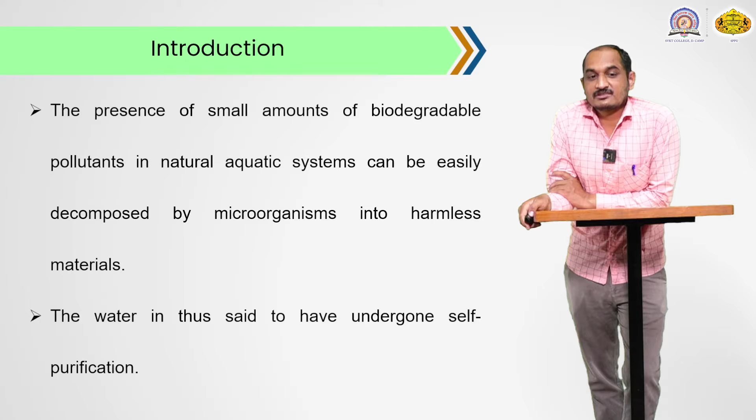First, we discuss the introductory part. We know that the presence of small amounts of biodegradable pollutants in natural aquatic systems can be easily decomposed by microorganisms into harmless materials. The water is said to have undergone self-purification, that is the self-purification mechanism for the purification of water. And there are several other mechanisms by which nature tends to purify water during the course of the hydrological cycle.

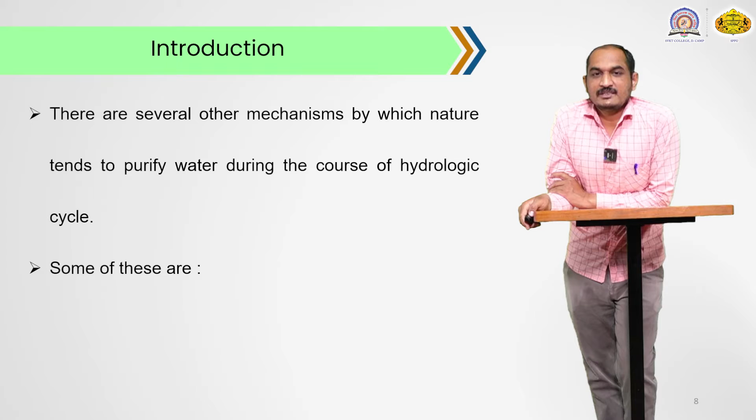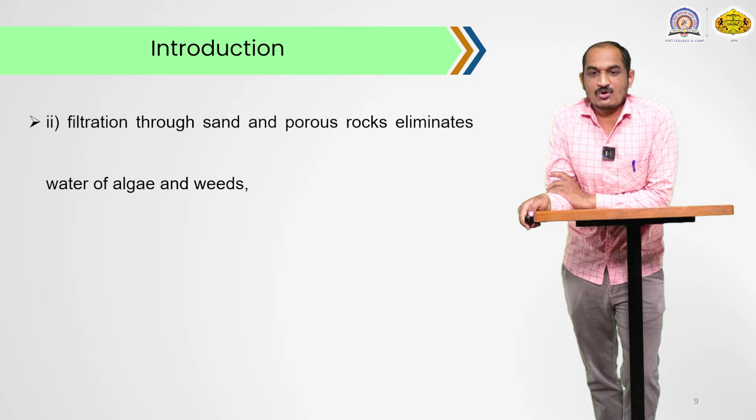We know the hydrological cycle; we already discussed it in our previous sessions. Some of these processes are given here. First, the crystallization of water as ice or evaporation as vapors removes the dissolved constituents. Second is filtration through sand and porous rocks eliminates, water of algae and weeds.

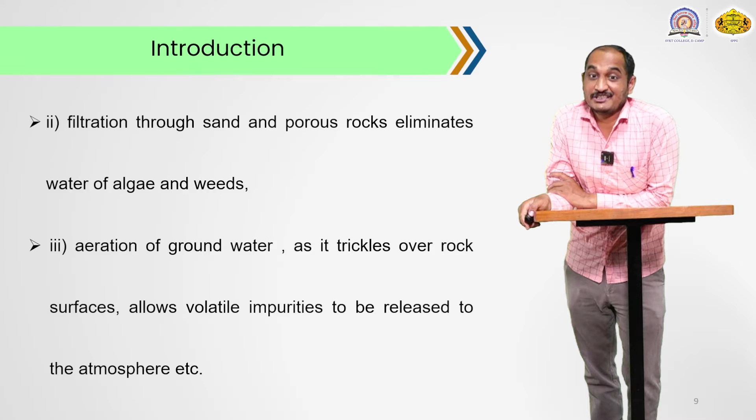And the third process is aeration of groundwater as it trickles over a rock surface, which allows the volatile impurities to be released to the atmosphere. These are the natural processes to purify water, and we say this is the self-purification process of water by nature.

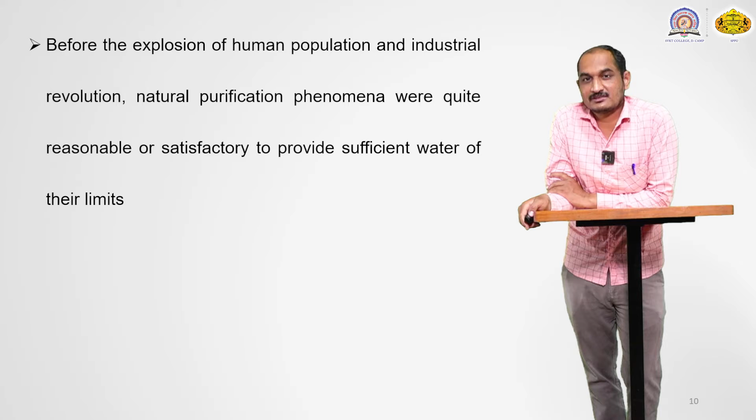Before the explosion of the human population and the industrial revolution, natural purification phenomena were quite satisfactory to provide sufficient water within their limit through this self-purification process, because the population was very small, and due to that the demand for purified water was fulfilled by these natural processes.

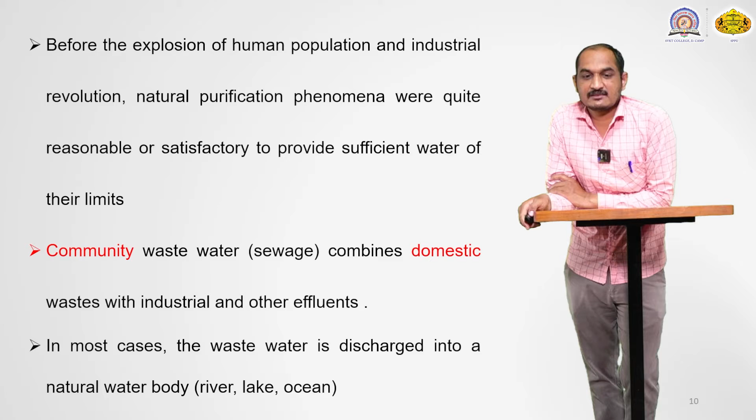The community wastewater, we say, is sewage, which combines domestic waste with industrial and other effluents. In most cases, the wastewater is discharged into natural water bodies like rivers, lakes and oceans. Therefore, a series of purification operations are necessary to restore these natural characteristics and the life-sustaining qualities of water.

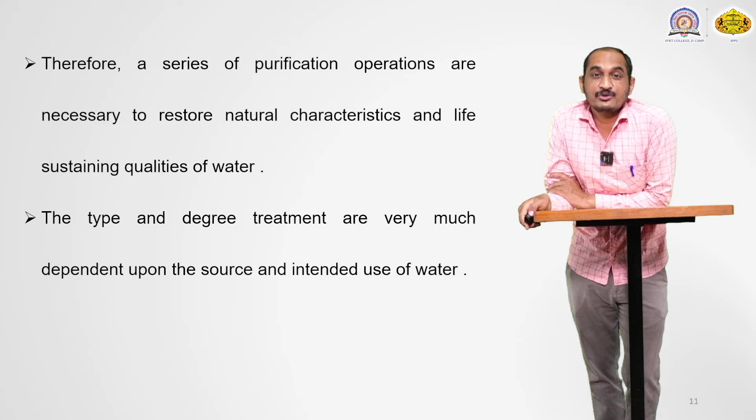So the type and degree of treatment very much depend upon the source and the intended use of water. These two terms are most important during the purification technique: one is the source and second is the use or purpose of water. In this section each major kind of treatment process is discussed.

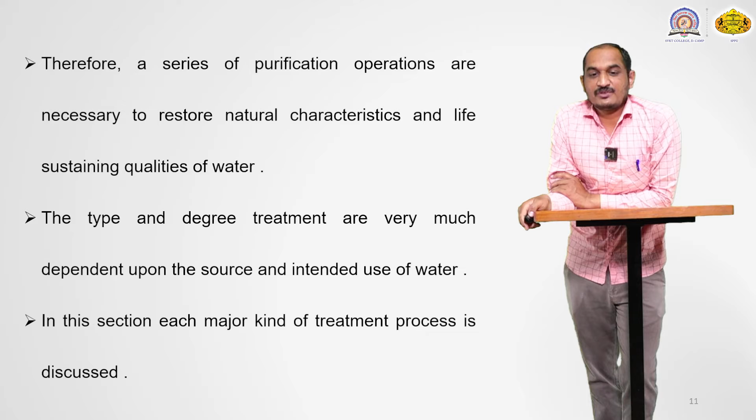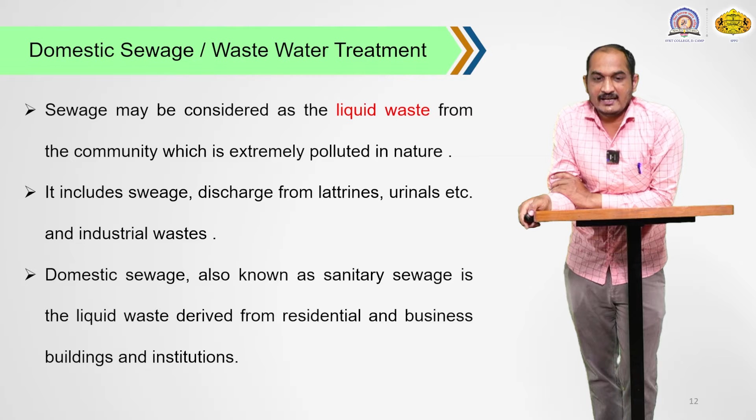First we discuss domestic sewage or wastewater treatment. We know that sewage may be considered as liquid waste from the community which is extremely polluted in nature. It includes sewage discharge from latrines, urinals, etc. and some industrial waste also. Domestic sewage is also known as sanitary sewage, and is the liquid waste derived from residential and business buildings and institutions. This is domestic sewage.

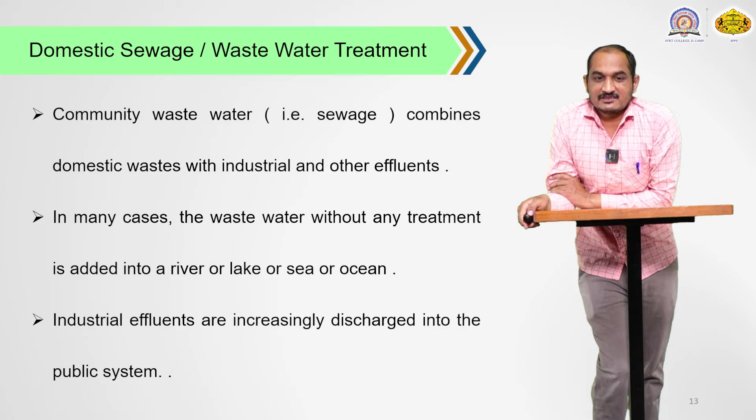The community wastewater, we say sewage, combines domestic waste with industrial and other effluents; we already discussed this point in the introduction section. In many cases, the wastewater without any treatment is added into rivers, lakes, seas or oceans, and industrial effluents are increasingly discharged into the public system. There are different examples of this type of discharge of industrial effluent into different public systems.

And the major constituents of community wastewater are thus obtained from domestic and commercial sources also. These are made up of human waste, because human beings are majorly responsible for water pollution. That includes human waste, solid and dissolved forms of food waste, then soaps, detergents and soil residues.

So efficient sewage disposal is important to the health of any community, and the easy method of municipal sewage disposal is the dilution method. We know that it's a very simple method for purification. In this method the waste is dumped into an available body of water such as a river or lake.

The oxygen present in such water bodies, over time, destroys the organic sewage. This is because under natural processes, most of the biodegradable substances of the sewage are rapidly destroyed, as microorganisms use the dissolved oxygen for the biodegradation of the organic content.

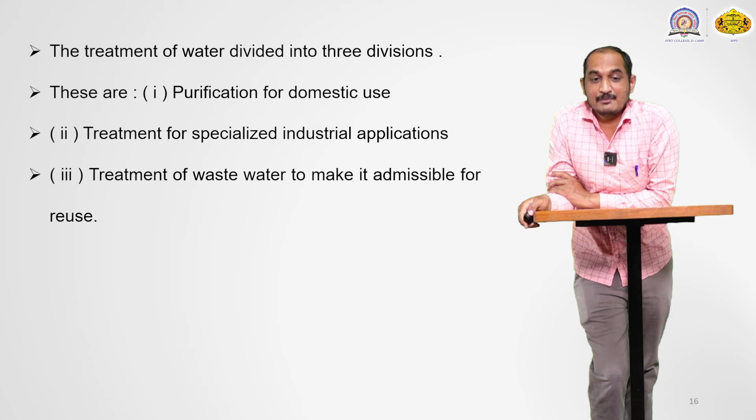The treatment of water is divided into three divisions, that is purification treatment. First is purification for domestic use. Second is treatment for specialized industrial applications. Third is treatment of wastewater to make it admissible for reuse. These are the three types of sewage water treatment.

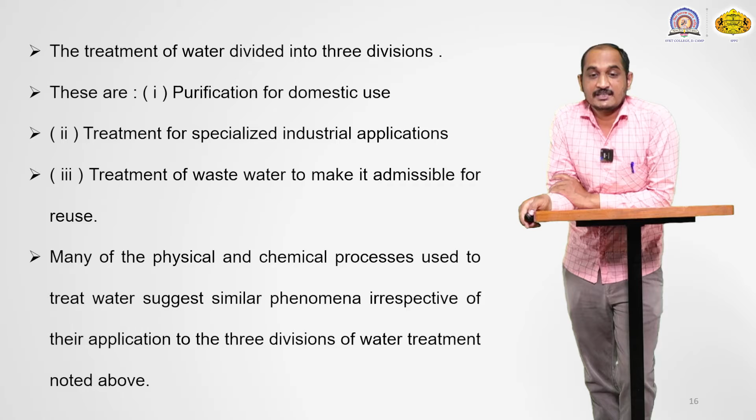Many physical and chemical processes are used to treat water. Purification requires different types of chemical and physical processes, similar phenomena irrespective of their application to the three divisions of water treatment noted above. This is a most important point concerned with the purification of municipal wastewater treatment. The most important function of the water treatment plant operator is to ensure that the water plant product offers no hazards to the consumers.

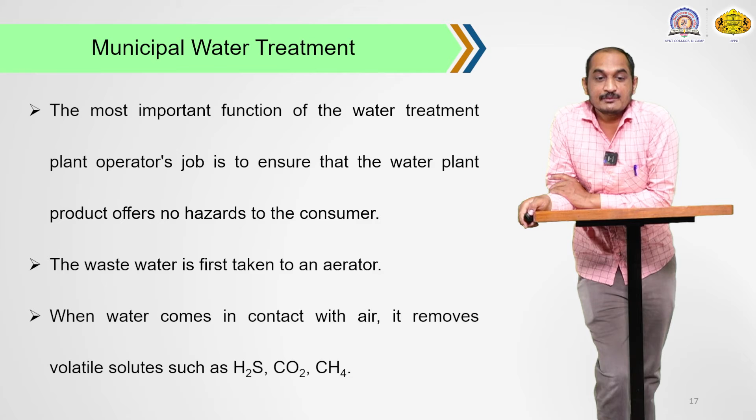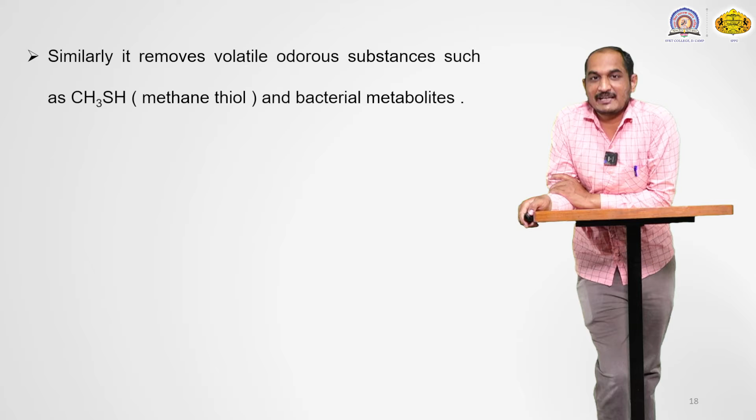The wastewater is first taken into the aerator. This is the first step for purification of municipal water treatment. In the aerator, water comes in contact with air and removes volatile substances like hydrogen sulfide, carbon dioxide and methane. Similarly it removes volatile odor substances such as CH3SH, methane thiol, and some bacterial metabolites. Then contact of oxygen with water helps convert soluble iron into insoluble iron, Fe2 to Fe3, which is a simple process of oxidation.

After the aeration step, lime as calcium oxide or calcium hydroxide is added to raise the pH of the water. Due to the addition of lime, calcium and magnesium ions are removed in the form of precipitate, which is allowed to settle down in a primary basin.

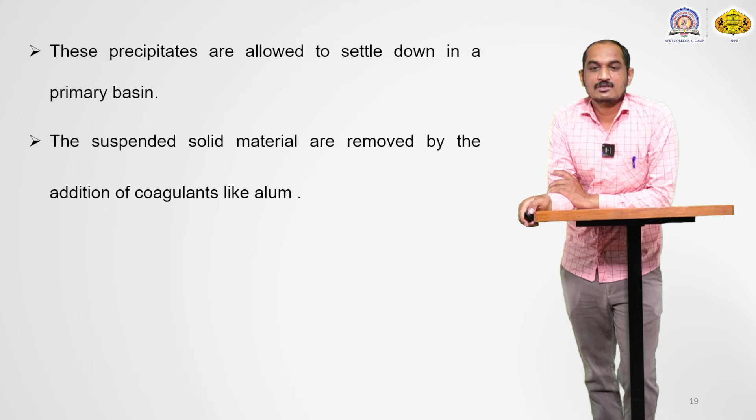Suspended solid materials are removed by the addition of coagulants like alum. It forms a gelatinous metal hydroxide which helps settle the colloidal particles - that is the role of the coagulant. Due to the formation of gelatinous metal hydroxide, colloidal particles are settled into the tank. Sometimes activated silica or synthetic polyelectrolytes are also added to enhance the coagulation process.

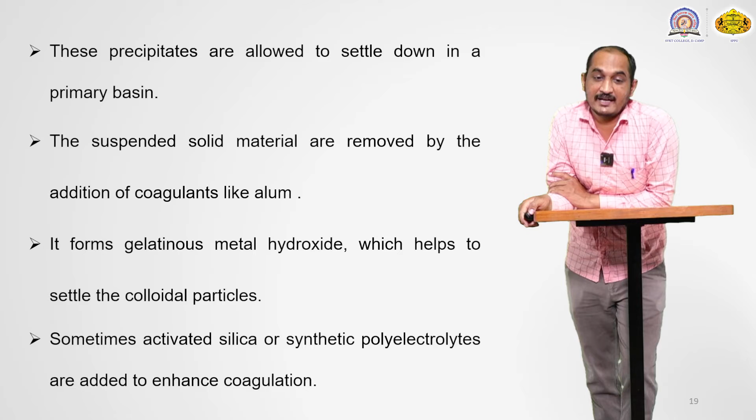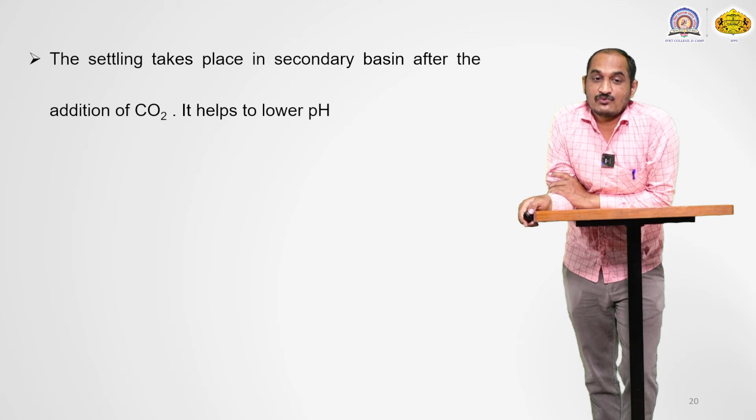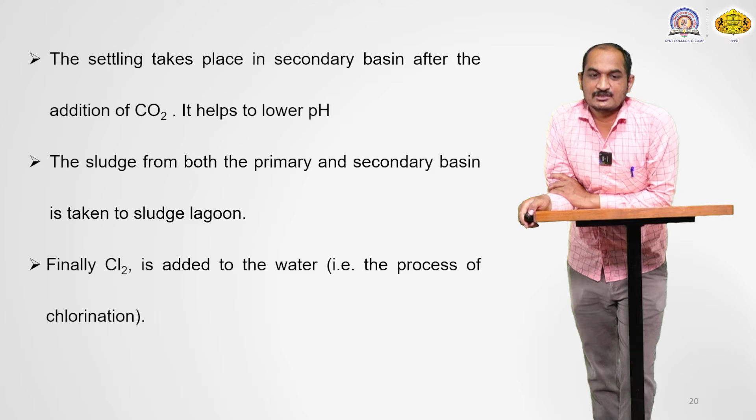The settling takes place in the secondary basin after the addition of carbon dioxide, which helps lower the pH of water. The sludge from both primary and secondary basins is taken into sludge lagoons, and finally chlorine is added to the water - this is the process of chlorination. These are the steps required to purify municipal wastewater.

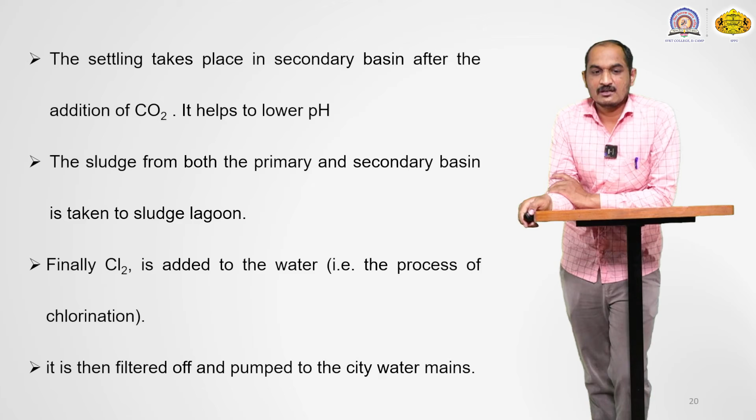Then it is filtered off and pumped to the city water mains.

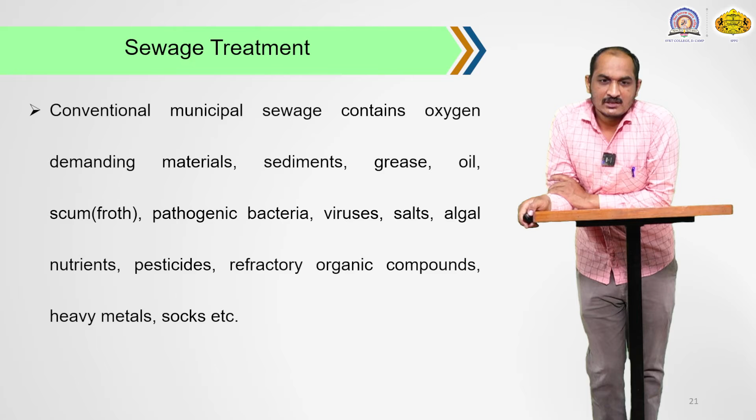Next important point concerns sewage treatment. Conventionally, municipal sewage contains oxygen demanding materials, sediments, grease, oil, froth, pathogenic bacteria, viruses, salts, algal nutrients, pesticides, refractory organic compounds, and can also contain heavy metals and salts. These are some sewage contents present in municipal water. It is the task of the waste treatment plant operator to remove as many of these materials as possible. A number of particulars are used to express the sewage.

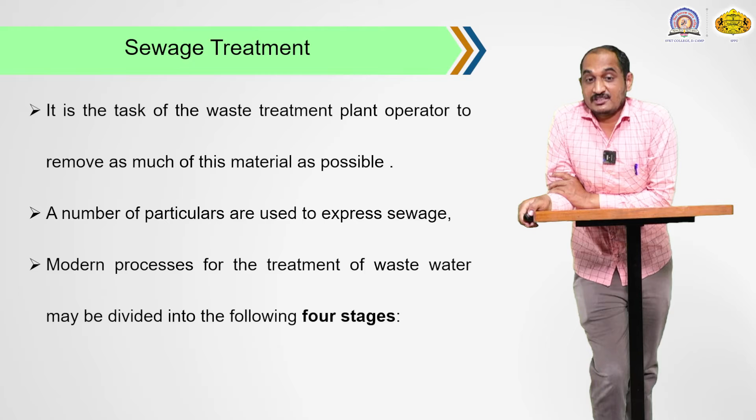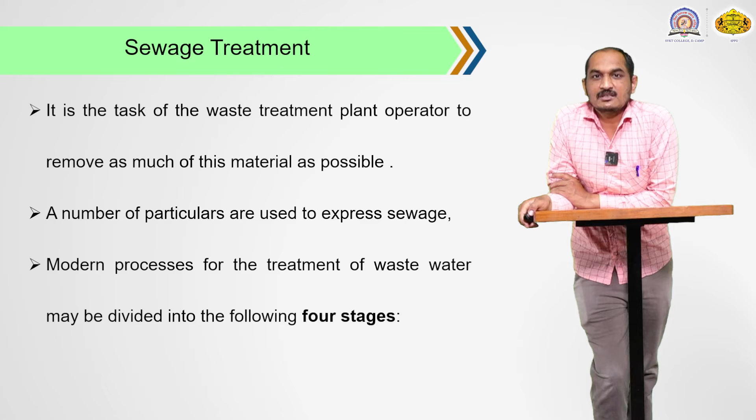Modern processes for the treatment of wastewater may be divided into 4 different stages. As told earlier, there are 4 stages for the purification of wastewater. In this session, out of these 4, we discuss the first 2. The treatment of wastewater has 4 stages. The first is the preliminary or preparatory waste treatment.

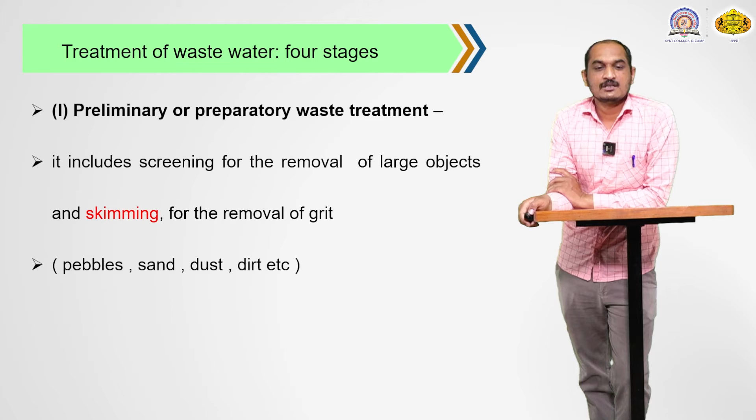This treatment includes screening for the removal of large objects, and the skimming process for removal of grit like pebbles, sand, dust and dirt particles. These different types of impurities are removed by the preliminary waste treatment.

The second stage is the primary or mechanical waste treatment. It helps settle down the suspended solids and colloidal particles, and then removes all this material. This is the second stage of purification, primary or mechanical waste treatment.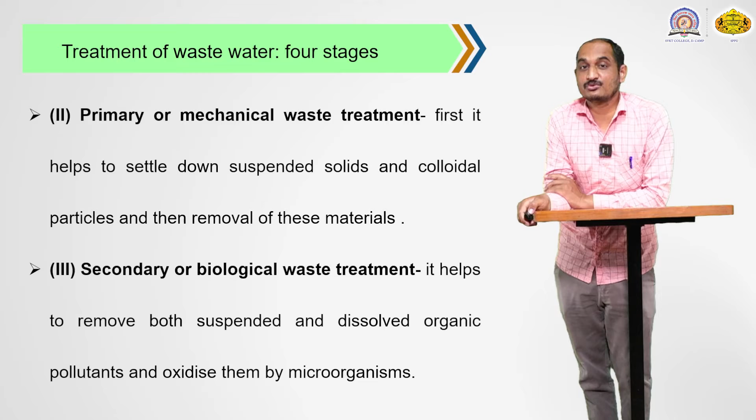The third stage is the secondary or biological waste treatment - the name itself indicates the process of this stage. It helps remove both suspended and dissolved organic pollutants and oxidizes them by microorganisms - that is the biological waste treatment given to wastewater. The final, fourth stage for purification of wastewater is tertiary or advanced biological, chemical and physical waste treatment.

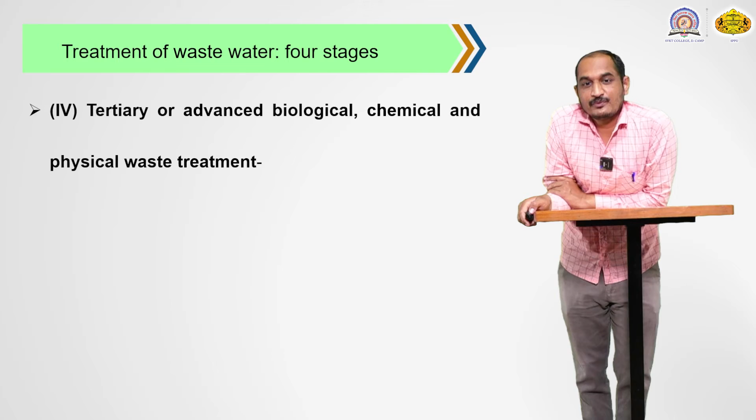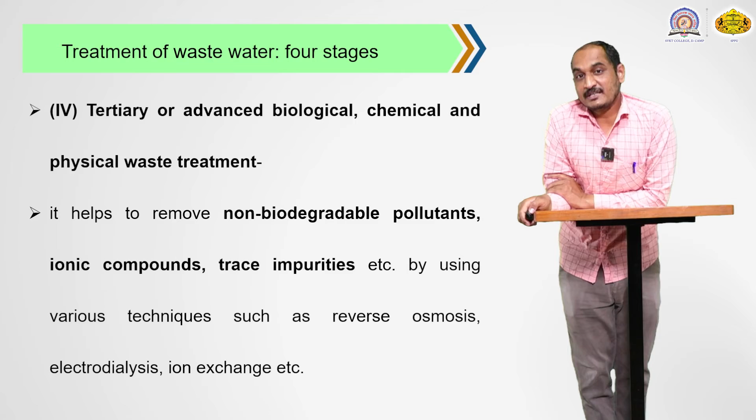In that fourth stage, all the treatments are given to the wastewater for purification purposes, like biological treatment, chemical treatment and physical waste treatment. This helps to remove the non-biodegradable pollutants, ionic compounds, and trace impurities, by using various techniques such as reverse osmosis, electrodialysis and ion exchange. This completes the fourth stage of wastewater treatment.

Now first we discuss stage one. The first stage for purification of wastewater is the preliminary waste treatment. This stage involves removal of impurities by two ways: first by the screening method, and second by the skimming method. Here we discuss both these methods.

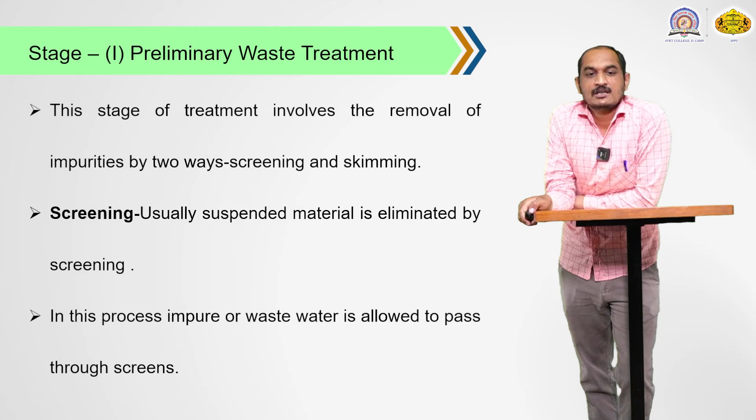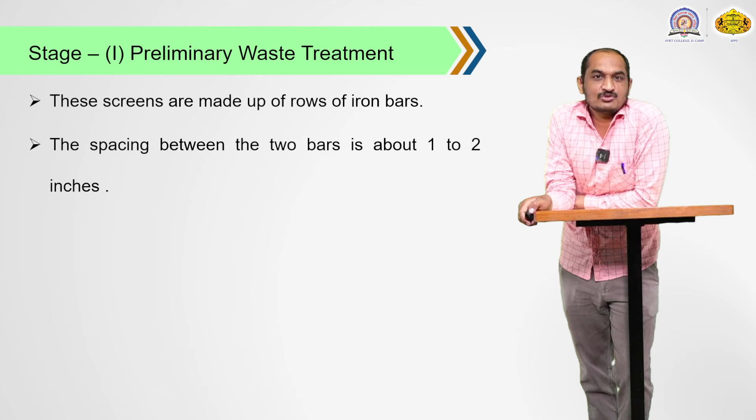First we discuss screening. Usually the suspended material is eliminated by the screening process, and in this process the impure or wastewater is allowed to pass through screens made up of rows of iron bars. The spacing between the bars is about 1 to 2 inches, narrow enough to hold back sticks, wood pieces, papers and polythene items, so all these impurities are trapped between the bars.

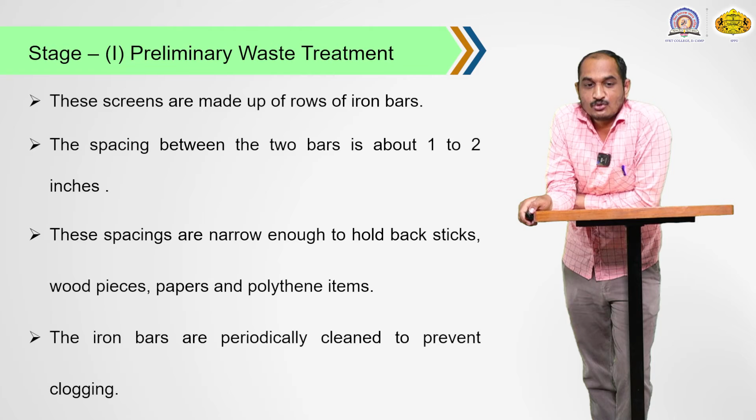The cleaning of this screen is most important, therefore the bars are periodically cleaned to prevent clogging. This is the simple process for purification.

Second one is skimming. In this second technique, the floating material is removed by the process of skimming. The lighter impurities like oil and grease rise to the surface and can be removed by the mechanical skimming process. This method is also helpful to remove impurities which are heavier than water.

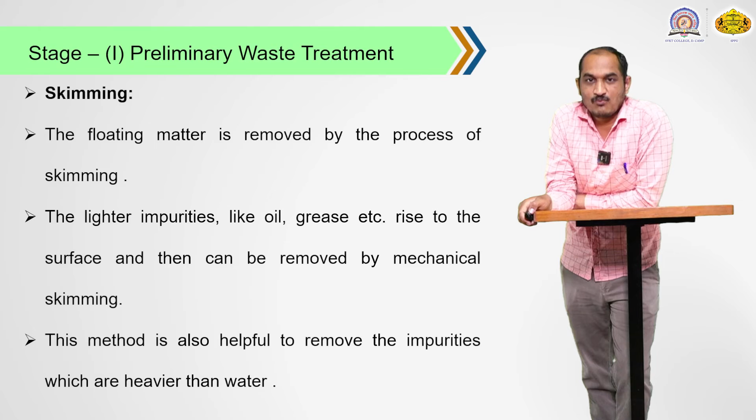This can be achieved by blowing compressed air into the wastewater. Due to the blowing of compressed air, air bubbles form and adhere themselves to the grit particles, lifting them to the surface where they are floated, and from there they are skimmed out.

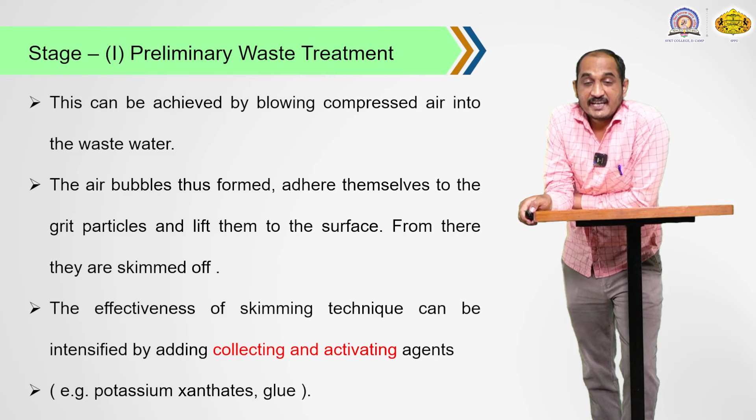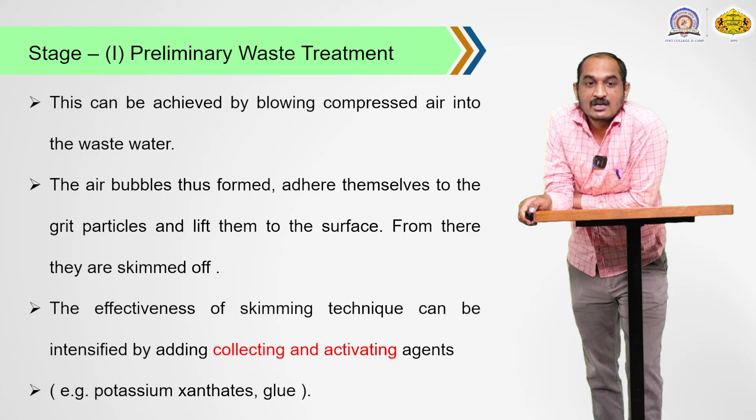The effectiveness of this skimming technique can be intensified by adding collecting and activating agents, to improve or increase the effect of the skimming process. For example, they add potassium xanthate, or they can add glue, for improving the effectiveness of the skimming process. These agents form a thin film of suspended particles to which air bubbles are attached.

Due to the added agents forming a film of suspended particles to which air bubbles are attached, the particles are floated on the water surface and are then easily skimmed out from the water. These are the skimming process. First we discussed screening, and then we discussed skimming.

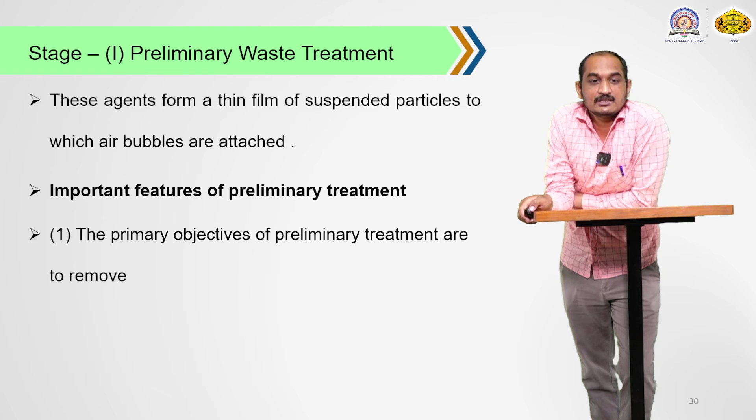Now here we discuss some important features of preliminary treatment of water purification. The first important feature is that the primary objective of preliminary treatment is to remove suspended and floating material by means of the screening technique. There are three important objectives.

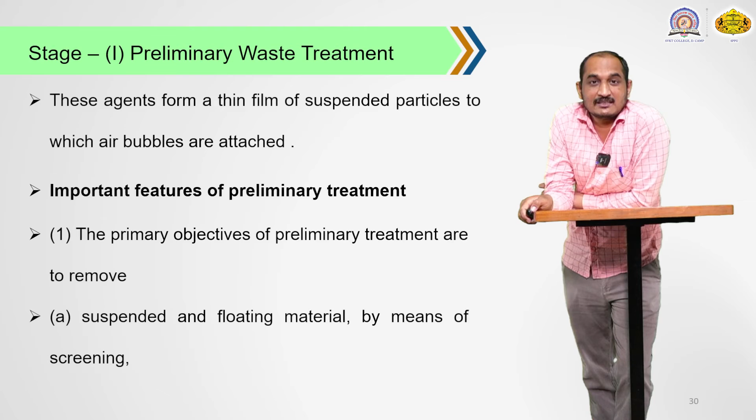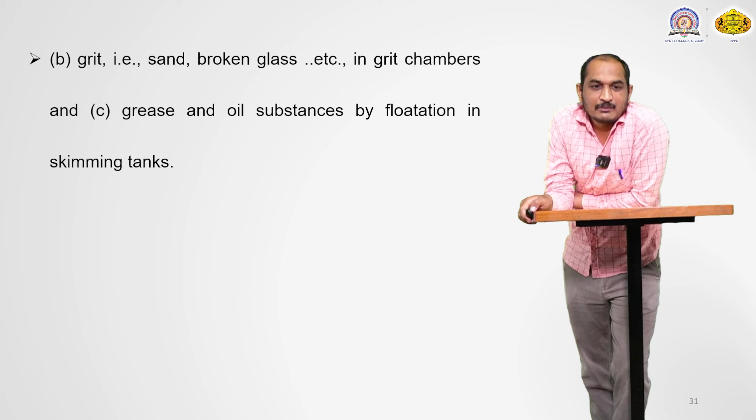First, suspended and floating materials are removed by the screening process. Second, grit particles such as sand and broken glass are removed in the grit chambers. Third, greases and oil substances are removed by flotation in the skimming tank. There are different types of tanks in series to perform each operation, so floating materials are removed in the skimming tank.

The next important feature of this process is the screens. Screens are used for removal of pieces of wood and plastic, that is the large particles from the water - the sewage or wastewater present in that sewage.

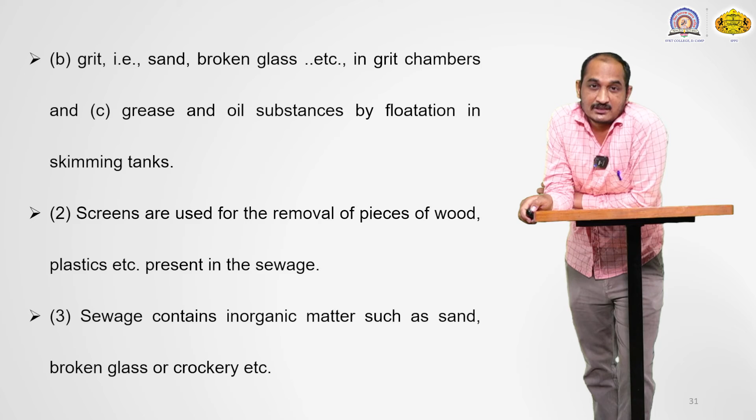The third important feature of this preliminary treatment is that the sewage contains inorganic matter such as sand, broken glass or crockery. These are the important features for preliminary wastewater treatment to remove different types of pollutants from the sewage water.

So they are removed in detritus tanks, and the coarse particles of grit are removed in the grit chamber. As I said earlier, there are different types of tanks to remove different types of impurities. The next important feature is that sewage also contains grease, oil, etc.

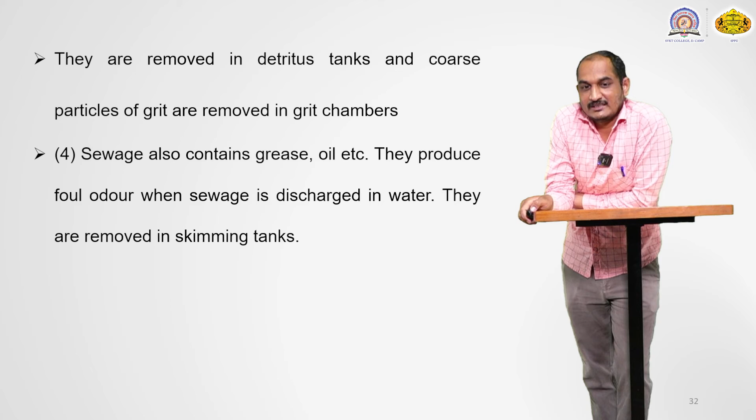These produce foul odors when the sewage is discharged into water, so they are removed in the skimming tank.

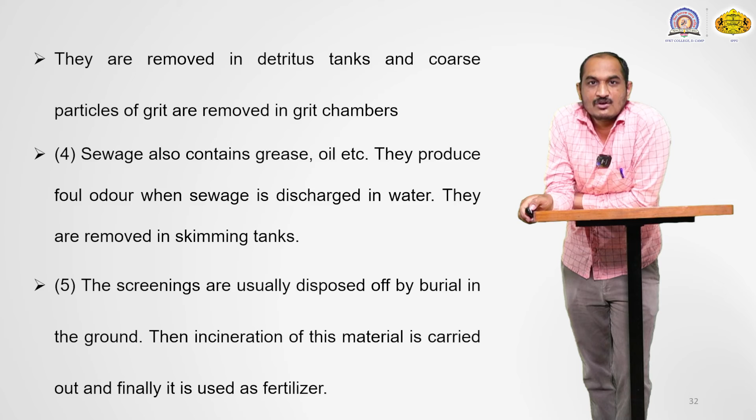The next important point about preliminary treatment is that the screenings are usually disposed of by burying in the ground, and then incineration of this material is carried out, and finally it is used as fertilizer. This is all about stage one, the preliminary treatment, given to the sewage wastewater. Second stage is the primary or mechanical waste treatment.

In that, the treatment involves the settling of the colloidal or suspended matter as the sludge. We know what is meant by sludge.

This treatment is given by two ways: first is sedimentation and second is flocculation. Remember that in the first stage, preliminary stage, there are also two processes, screening and skimming. In the second stage, there are also two processes, sedimentation and flocculation. We will discuss both these processes one by one.

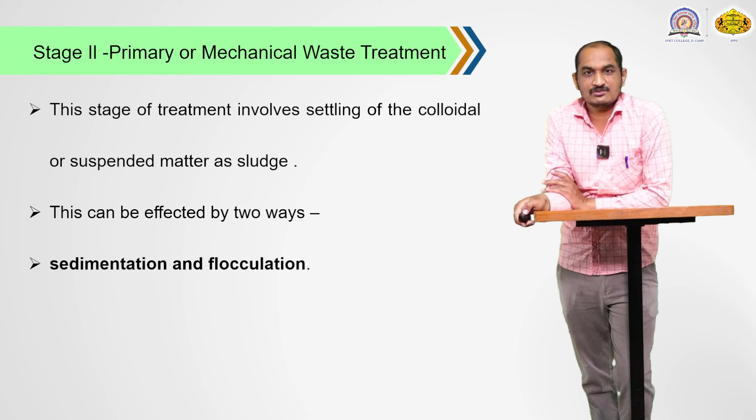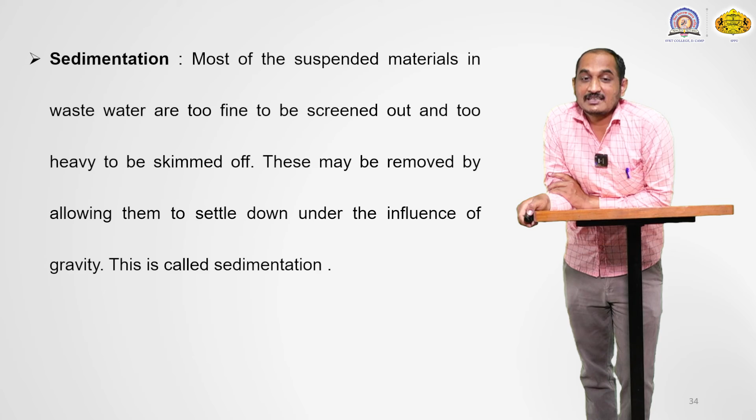First we discuss sedimentation. We know that most of the suspended materials in wastewater are too fine to be screened out, and too heavy to be skimmed off, because they are not removed in the first preliminary stage. These may be removed by allowing them to settle down under the influence of gravity, and that process is called sedimentation.

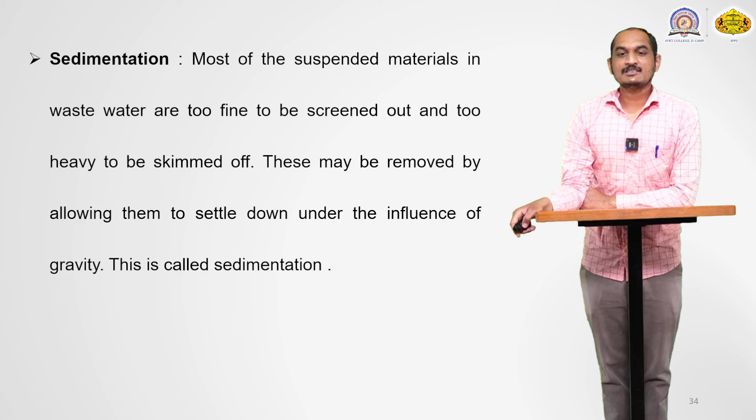Once again, I repeat the definition of the sedimentation process. Most suspended material in wastewater is too fine to be screened out, and too heavy to be skimmed out. So these may be removed by allowing them to settle down under the influence of gravity, and that process is called sedimentation.

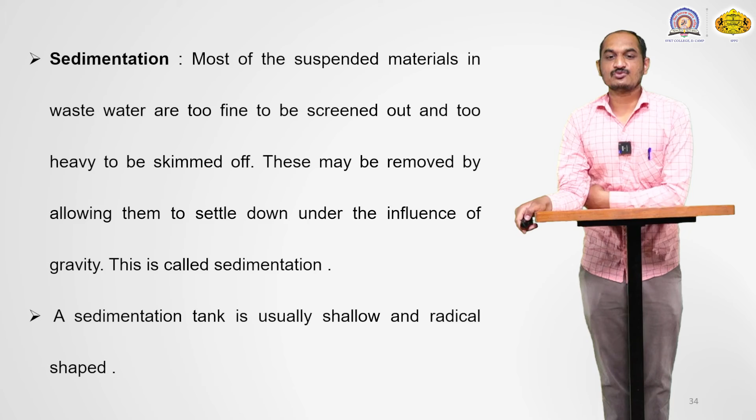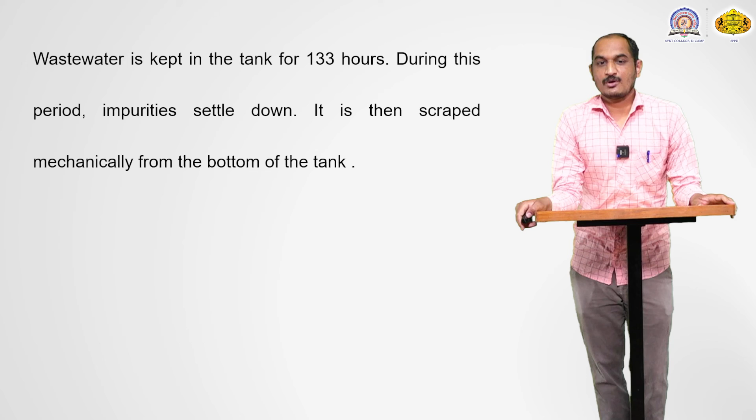A sedimentation tank is usually shallow and radial in shape. Wastewater is kept in the tank for about 1 to 3 hours. During this period, impurities settle down at the bottom of the tank, and then it is scraped mechanically from the bottom. This is the process of sedimentation.

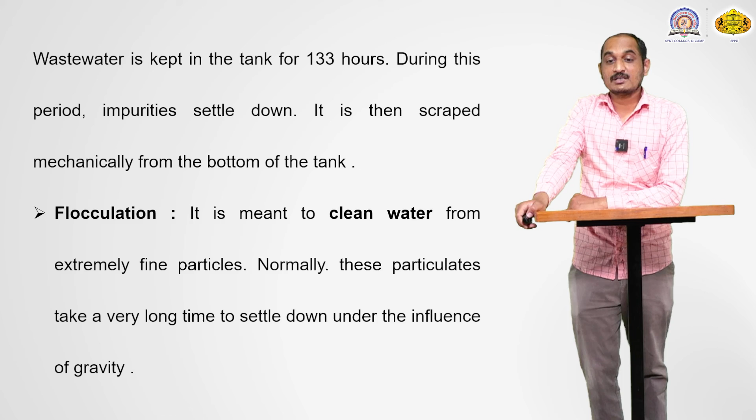Next process is flocculation. What is meant by flocculation? It means to clean water from extremely fine particles. Normally these particulates take a very long time to settle down under the influence of gravity, and the process of sedimentation is not effective for their removal. Hence, in order to increase the rate of sedimentation, flocculating agents are used.

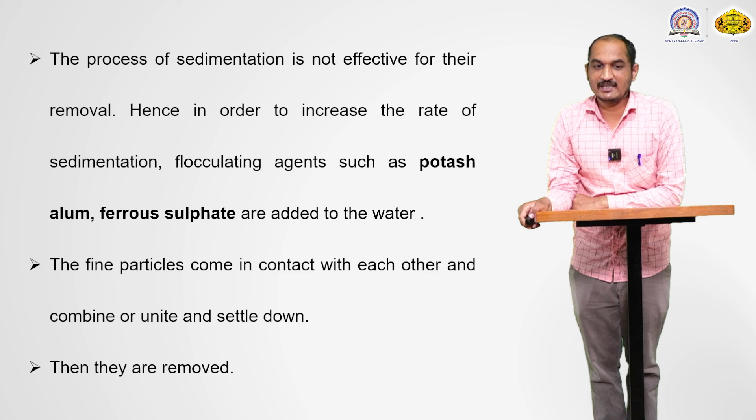For example, potash alum and ferrous sulphate are added to the water to improve the flocculation process. Due to that, the fine particles come in contact with each other and combine or unite and settle down at the bottom of the tank, and they are removed easily by a mechanical process.

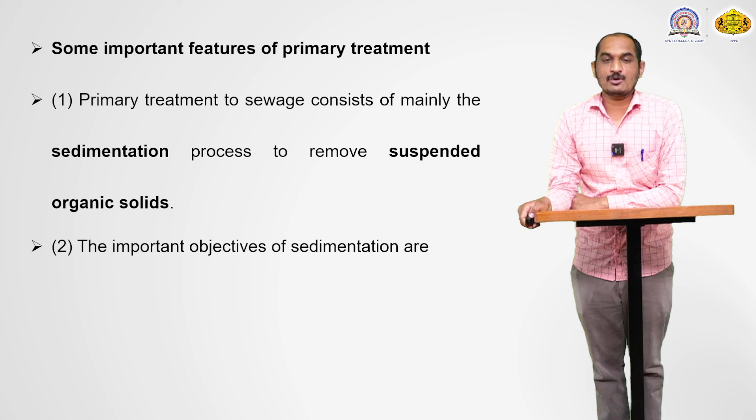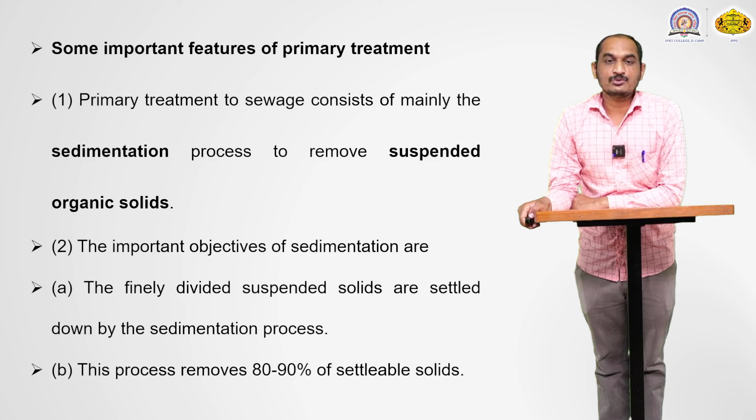Next, the important features of this primary treatment, the second stage of sewage water treatment. First, primary treatment of sewage consists mainly of the sedimentation process to remove suspended organic solids. Second, the important objective of the sedimentation process is that finely divided suspended solids are settled down, and this process removes about 80 to 90% of the settleable solids.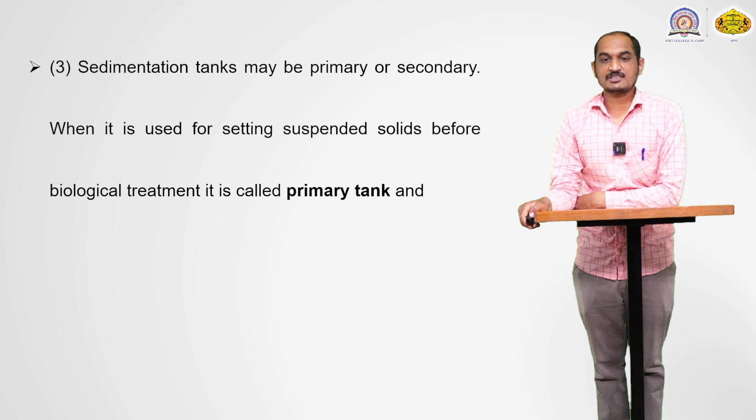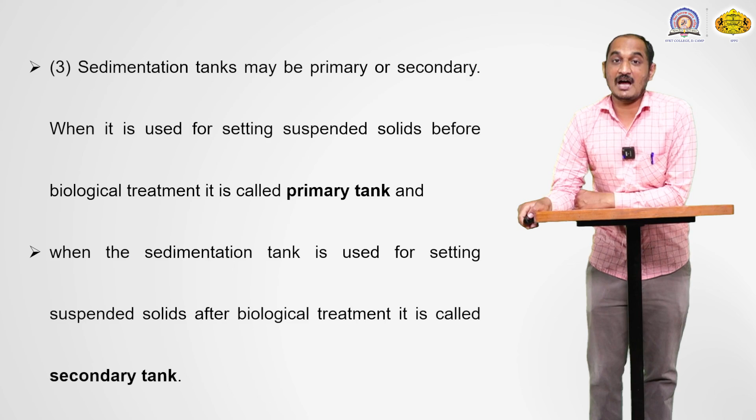Third important feature of this stage: the sedimentation tank may be primary or secondary. When it is used for setting suspended solids before biological treatment, it is called a primary tank, and when the sedimentation tank is used for setting suspended solids after biological treatment, it is called a secondary tank.

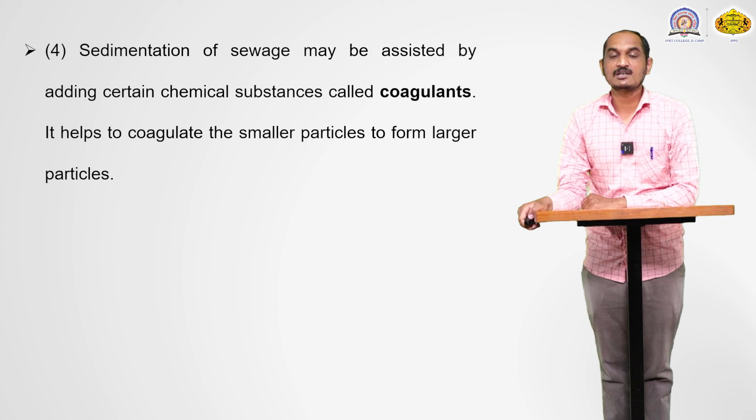Next important feature of this primary stage is that sedimentation of sewage may be assisted by adding certain chemical substances called coagulants. There are different types of coagulants. They help to coagulate smaller particles to form larger particles. The commonly used coagulants are alum, lime, ferric chloride, etc.

Now some advantages and disadvantages of this coagulation process. First, the advantages: biological oxygen demand and color are much reduced, and the operation is simple. Like the advantages, there are some disadvantages of coagulation as well: this is a costly process, and a skilled supervisor is required for the coagulation process. These are some advantages and disadvantages of the coagulation process.

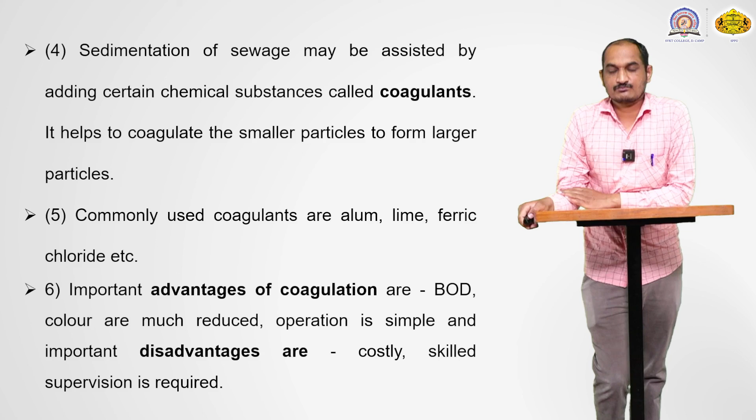So in today's session, we discussed the introductory part about wastewater treatment and water pollution. Then we discussed domestic sewage and wastewater treatment, including municipal wastewater treatment and how wastewater is treated by the municipal corporation, covering the different stages of treatment.

Then the important point we discussed is sewage treatment. As I told earlier, there are 4 stages for sewage treatment, but in today's session we discussed the first 2 stages: first the preliminary or preparatory waste treatment for sewage, and second the primary or mechanical waste treatment.